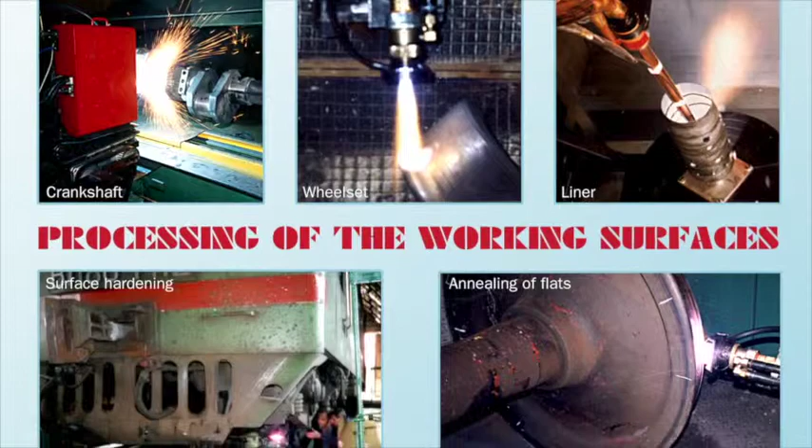Our company brings together leading experts in the field of plasma technology and gas thermal processing of metals. Since 1996, we have actively participated in solving the complex of rail wheel problems on Ukrainian railways. We have carried out long-term successful tests of heat-treated wheels with the participation of leading specialized institutes of Ukraine.

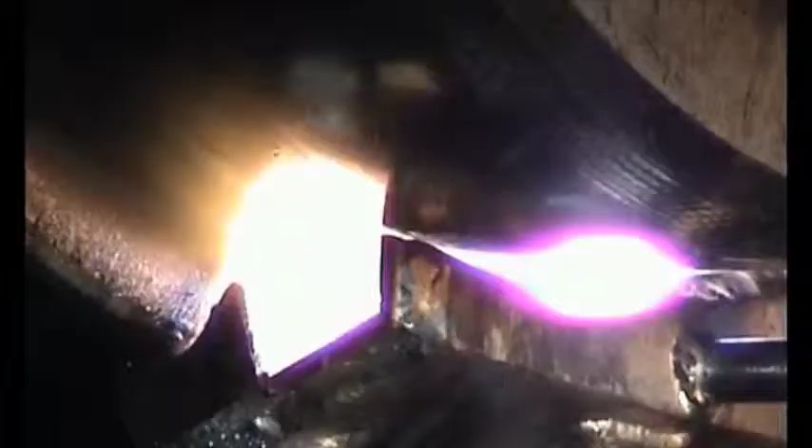Our equipment for plasma hardening of solid-rolled and bandaged railway wheels is widely used on the railways of Ukraine, Moldova and the Baltic states. The problem of wheel and rail joint operation, their reliability and life duration, is of current interest for all railways in the world.

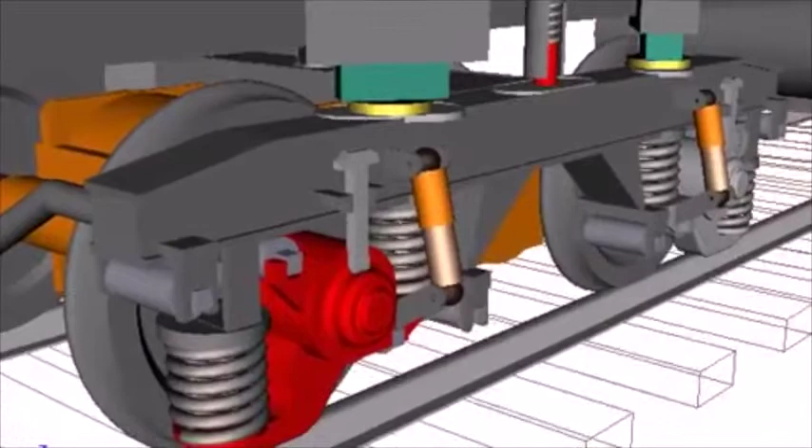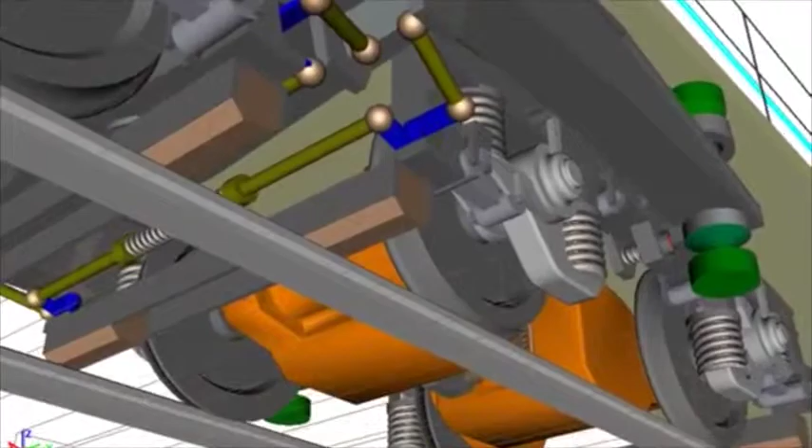Railway wheels and rails must withstand the specified level of load and force impact arising from interaction between them while preserving long durability. Even today, the standard wheel resource does not meet increased operating requirements. The current trend of increasing train speed and increased loads leads to growth of tension in the contact of rail wheels and rails. This inevitably is accompanied by significant wear of contacting surfaces, which is a major cause of premature replacement of wheels and rails.

Long-term analysis of the wheels and track on the railways of Ukraine shows that during operation, the rolling surface hardness of the wheel and surface hardness of the non-heat-treated rail increases from 270 to 400 Brinell to a depth of 5 mm. This occurs as a result of cold hammering of metal surface layers.

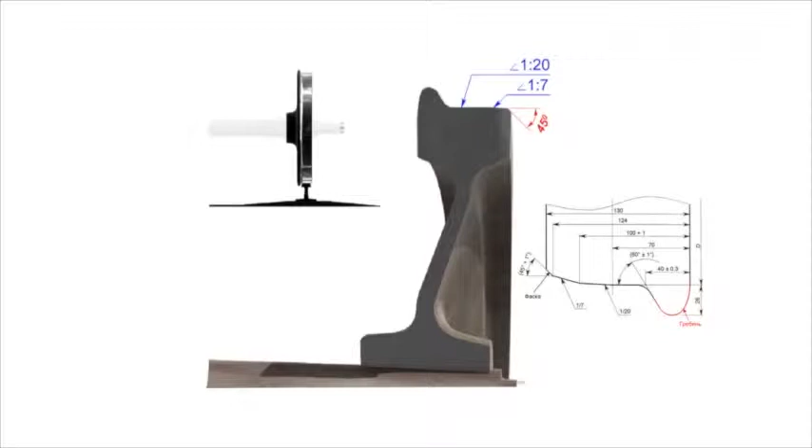At the same time, the surface hardness of the wheel flange and lateral portion of non-tempered rail remains unchanged, 270 to 280 Brinell. That is why, in the contact area of the wheel flange and lateral working head of the rail, increased surface wear is observed. This necessitates gradual machining of wheels and ultimately their premature replacement.

Another important factor influencing the wear is friction in the wheel and rail contact zone, which occurs under conditions of wheel sliding in curves.

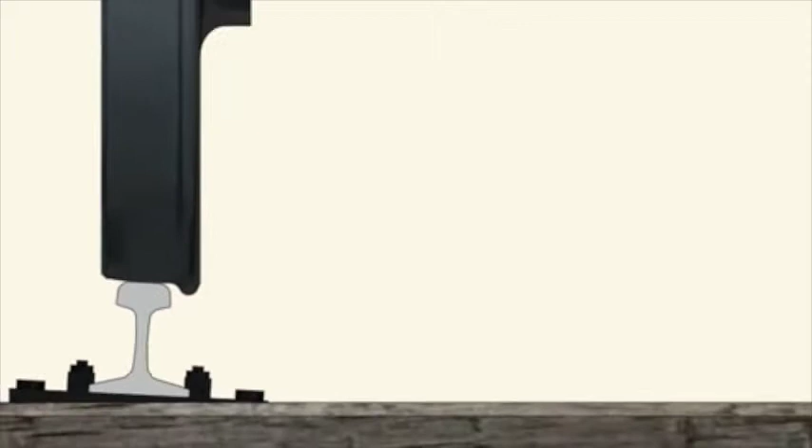With high friction between the wheel flange and the lateral working face of the railhead, fuel consumption for hauling operations significantly increases, wear of wheel flanges increases, and in some cases there is danger of derailing of wagons.

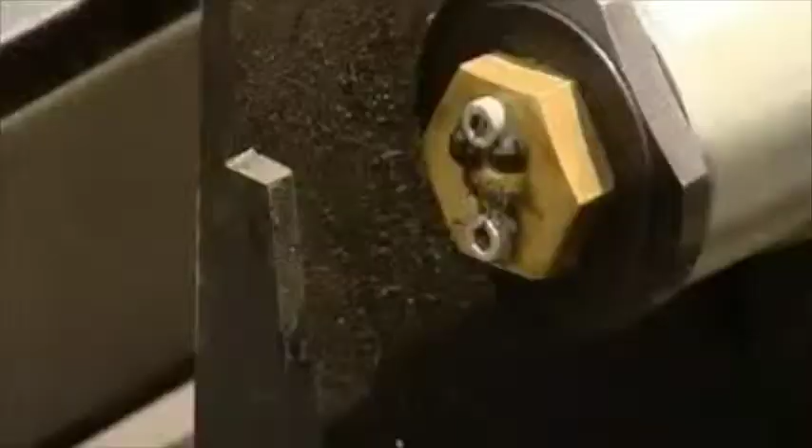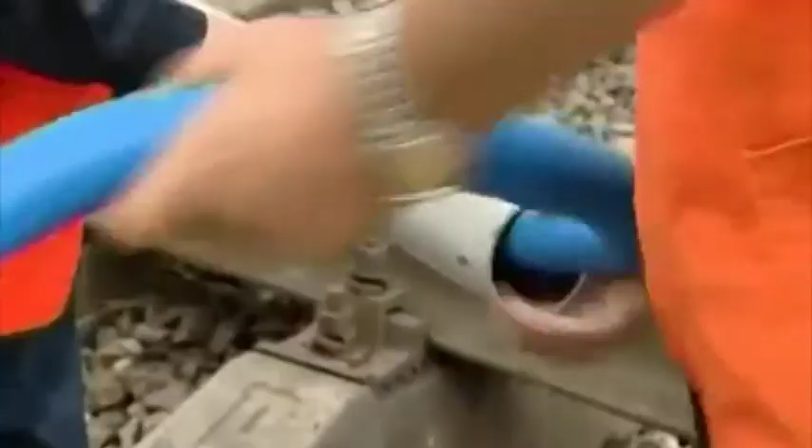The most common technique for decreasing the coefficient of friction is the use of traveling lubricant pumps. They are used for forced rail and wheel flange lubrication. However, they are extremely unreliable in operation and do not provide sufficient effect.

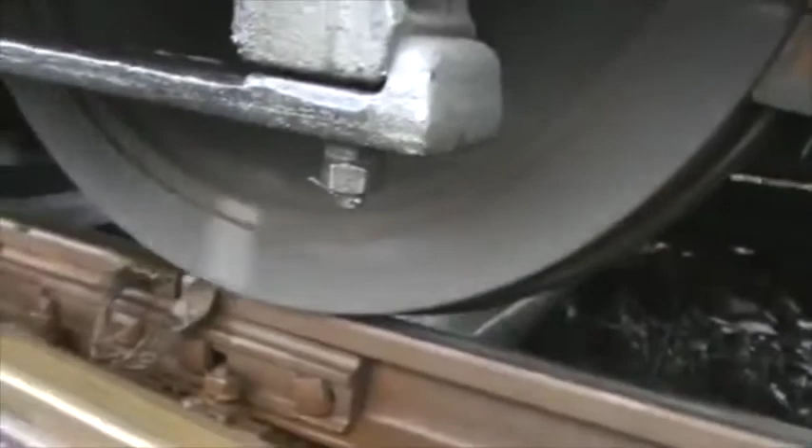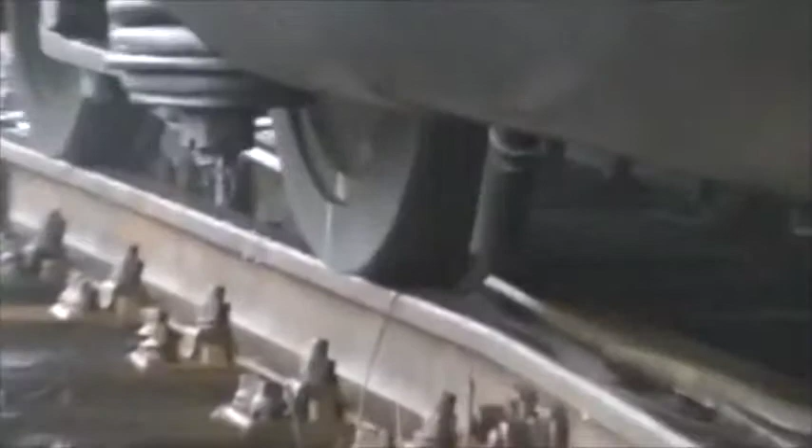This technology is particularly ineffective in conditions of rolling stock operation in the highlands. Grease inevitably falls on the tread surface, which causes a slippage effect. To eliminate this effect uphill and downhill, it is required to pour sand on the rails, causing a natural converse effect: accelerated wear of rails and wheels.

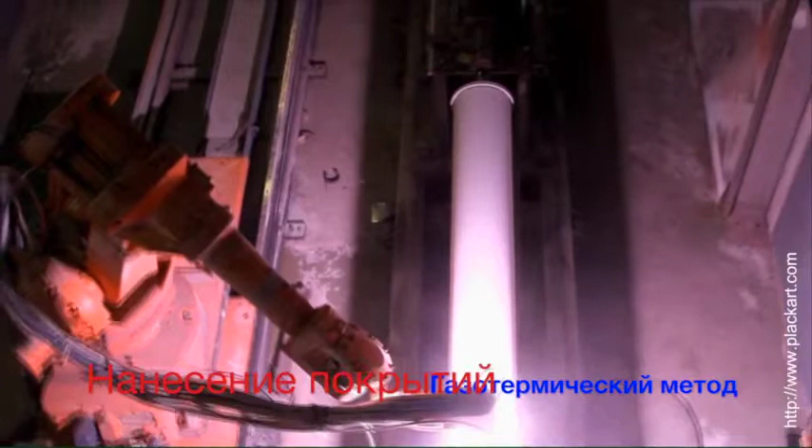As a means of solving the wheel-rail complex problem, attempts were undertaken to apply low-friction coatings on the lateral surface of the railhead by gas thermal method. This solution had certain advantages, but insufficient mechanical strength of adhesion to the substrate causes the coating to strip off in a very short term. Therefore, this trend can be regarded as a dead end.

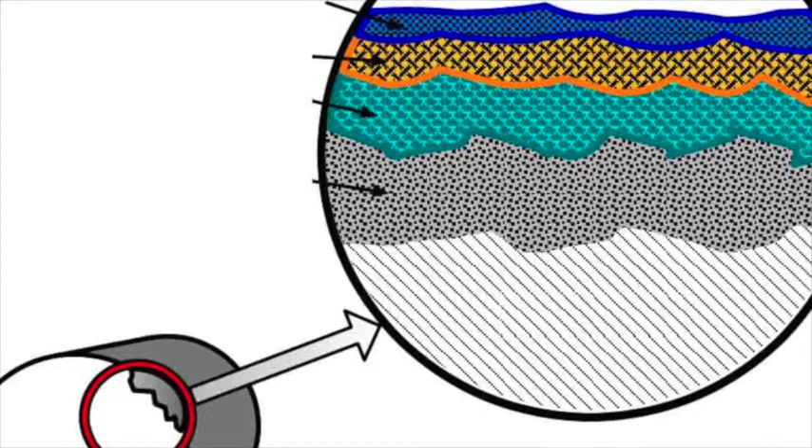As practice shows, the ideal solution of the wheel-rail complex problems can be obtained through increase of the surface hardness of the working areas of rails and wheels, selection of the optimal ratio of these values, and reduction of the coefficient of friction in the contact zone.

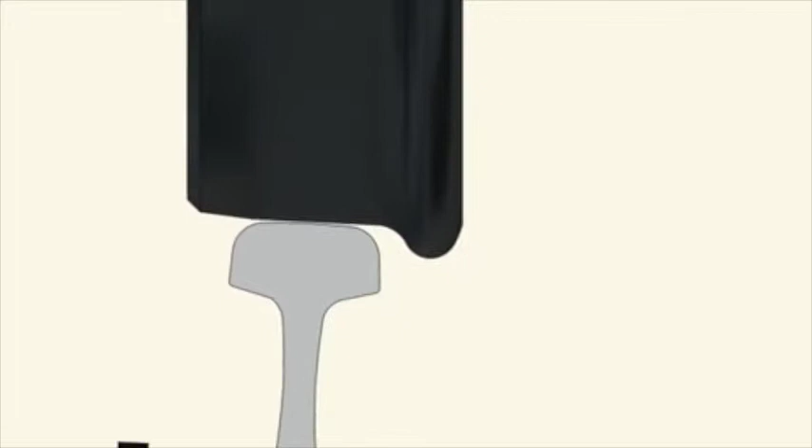We have essentially proved that hardening wheel flanges to a high hardness becomes an effective way of lateral wear control of both wheel flanges and rails. Similar conclusions were reached by Swedish and German experts.

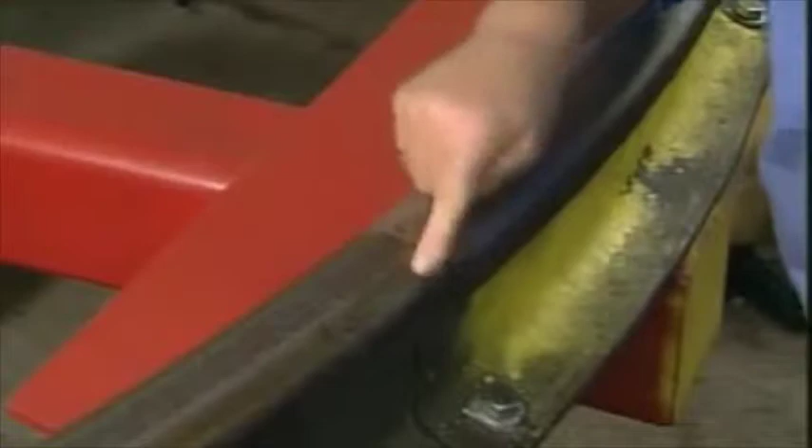They offer a solution which performs melting of the surface by laser and application of a 2 mm wide strip of cemented carbide alloy on it. It is expected that this technology slows down the wear of wheels by 4 times, while reducing wear of rails and noise level. These figures are questionable, given that the bandwidth of the hardening strip is only 2 mm.

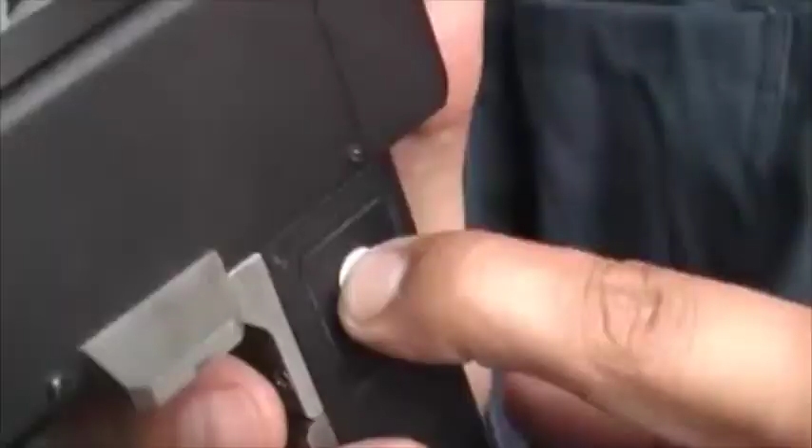In addition, this technology has a number of disadvantages. It is quite complicated in implementation and requires highly skilled personnel.

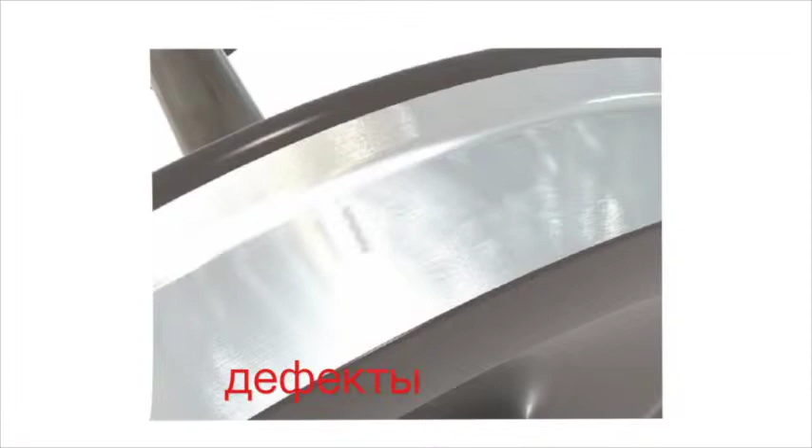The practice of using argon plasma hardening method, developed by Russian specialists as well as HFC in Poland, is also not widely used because of significant deficiencies, including low depth of surface hardening, low productivity, and high probability of defect formation, depending on environmental conditions.

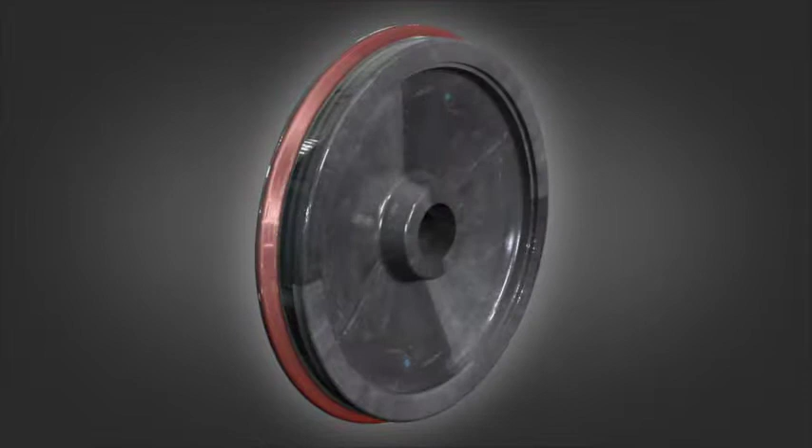The development we offer has a number of significant advantages, and at the moment can be considered the most effective means of solving the rail wheel complex problem.

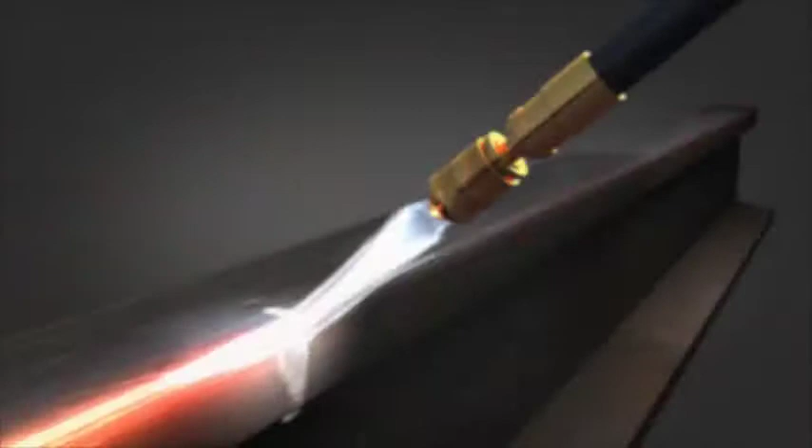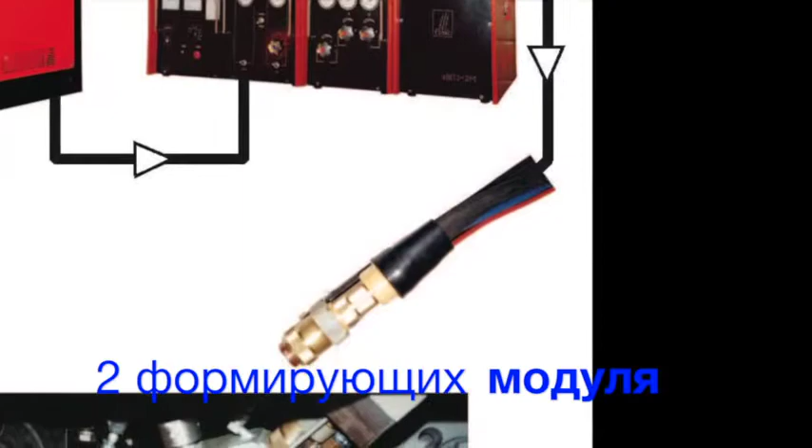The unit is designed for surface hardening of wagon wheel flanges and the working part of the rail head surface. The unit includes: first, a source of energy; second, control equipment consisting of 3 units; third, a computer module; fourth, 2 forming modules with cable hose pack up to 8 meters long; fifth, an autonomous cooling unit.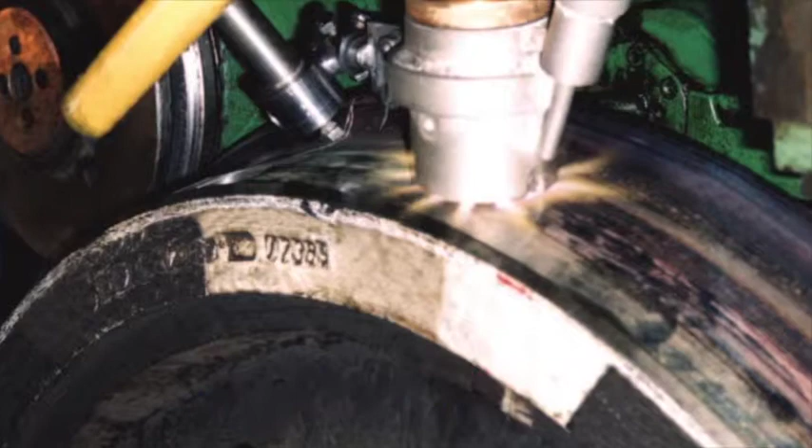The basic unit can be supplied without the computer module. On the basis of the unit, we developed a new technology of slid flat release on the rolling surface. Equipment and technology are patented in Ukraine, Russia, Kazakhstan and China.

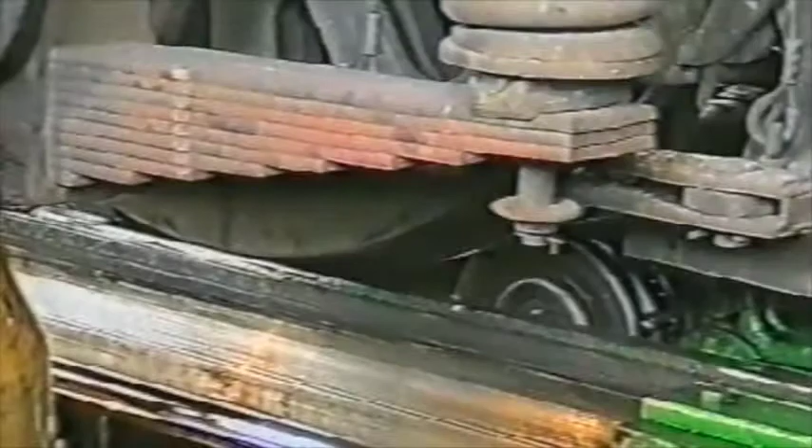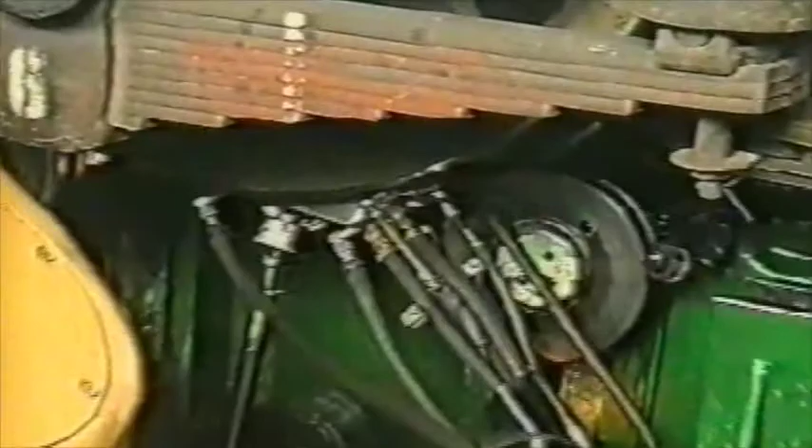After long-term run tests of hardened wagon wheels on the test railway routes of Dnipropetrovsk Institute of Transport Engineers, the first set of equipment was installed at the Znamenka locomotive depot. Since 1996, the railroad depot carries out locomotive wagon wheel flange hardening directly under the locomotives. In 1996, our equipment was also installed in the locomotive depot Lviv Zahid.

In 2000, a modified unit with computer module was installed in this depot. In locomotive depot Krasny Liman, the equipment was installed in 2012.

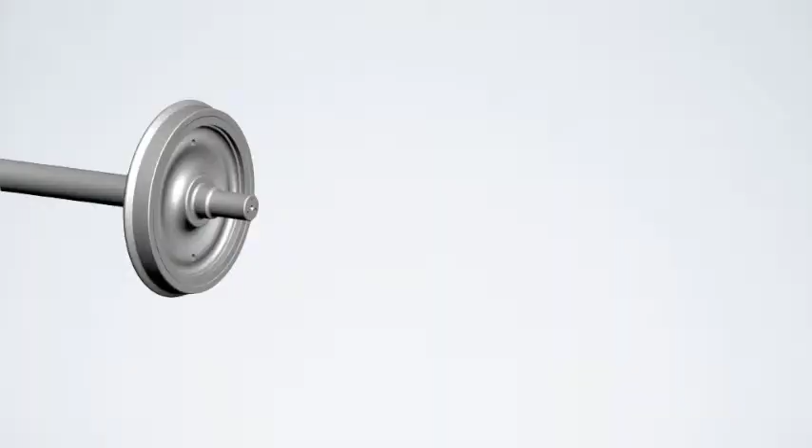Our solution has the following indisputable advantages. Cost effectiveness: the cost price of one wagon wheel hardening is only $23. In Ukraine, the annual economic effect is from 800,000 to 1.5 million US dollars per railroad depot.

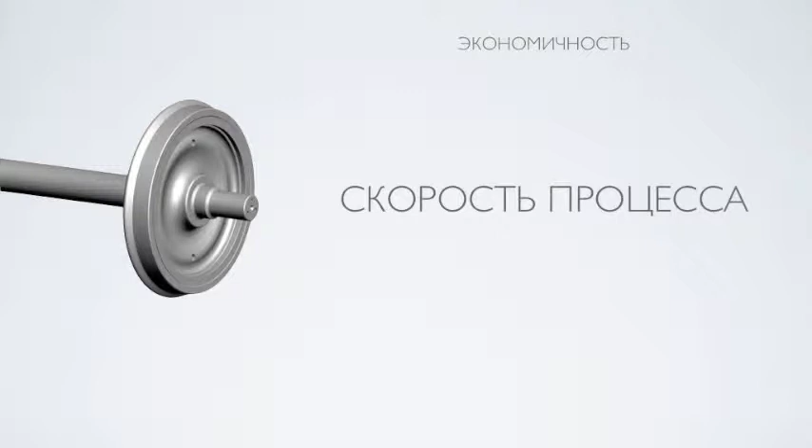High speed of the process: one wheel hardening takes only 5 minutes. Ease of operation: no need for highly skilled service personnel and no complex procedures.

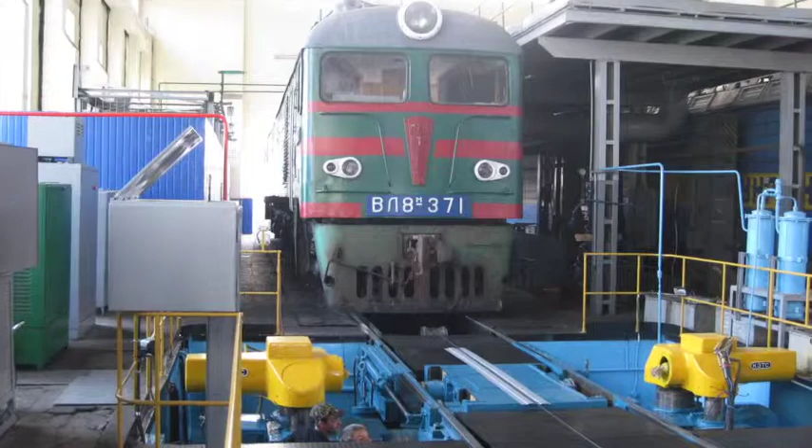High reliability of equipment, proved by long-term successful operation in Ukraine, Moldova and the Baltic countries. Independence from environmental conditions: the equipment produces no defects even when operating in open conditions at temperatures from -10 to +40 degrees Celsius. Process versatility.

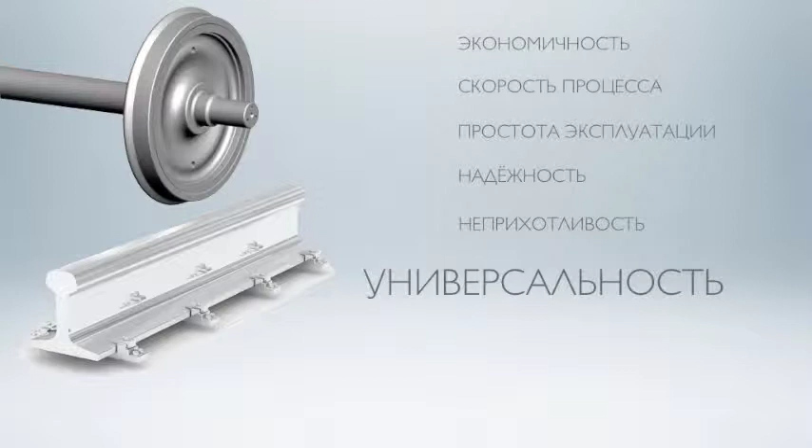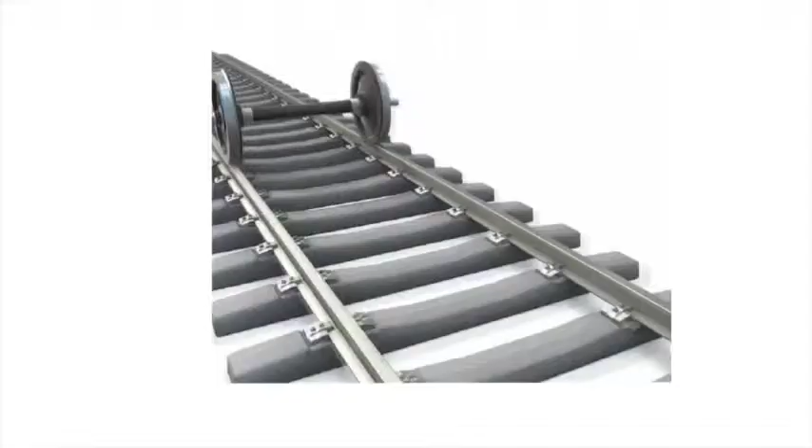The equipment can be used for hardening both wheel flanges and rail heads. Only our equipment is capable of carrying out hardening of the rail working head directly on the railways and in outdoor conditions. After wheel flange and working rail head hardening, the coefficient of friction reduces by 40%.

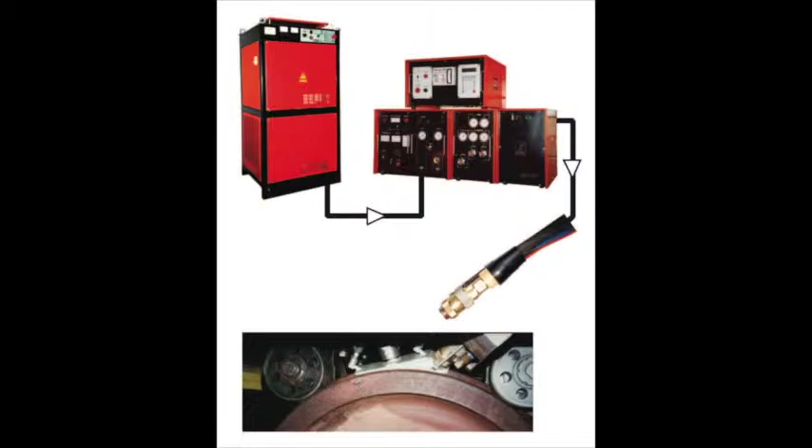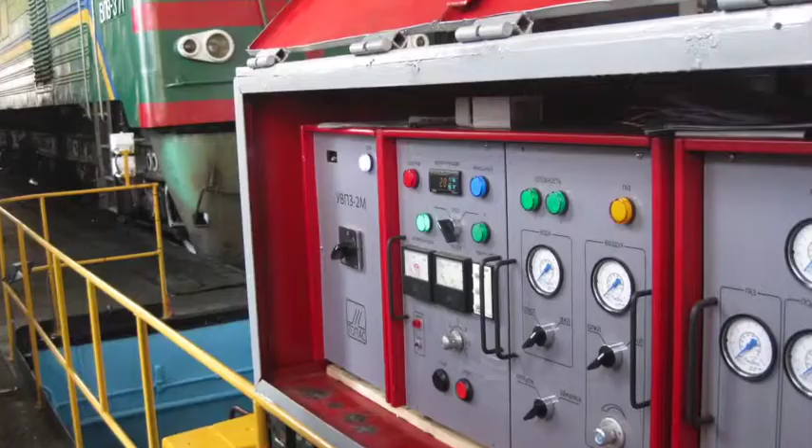Technologies and equipment offered by us are a versatile, effective and cost-effective solution to rail wheel complex problems, have a number of advantages compared with other methods, and are of interest for all railways in the world.

At the moment, we have produced and installed more than 30 sets of equipment for wagon wheel hardening. Hardening of locomotives, passenger and freight wagons, and suburban electric trains is carried out.

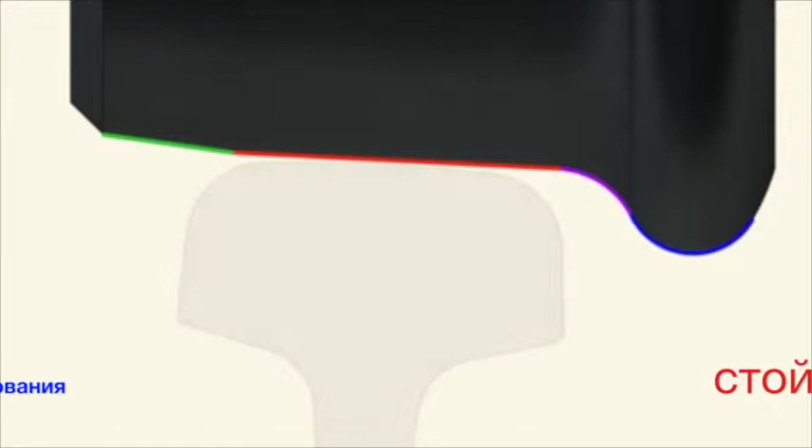Unique experience in the formation of optimal hardening structures has been accumulated. Our equipment and technology are certified in Ukraine, Moldova and the Baltic countries and provide high resistance to cracking in the range of surface hardness from 300 to 600 Brinell.

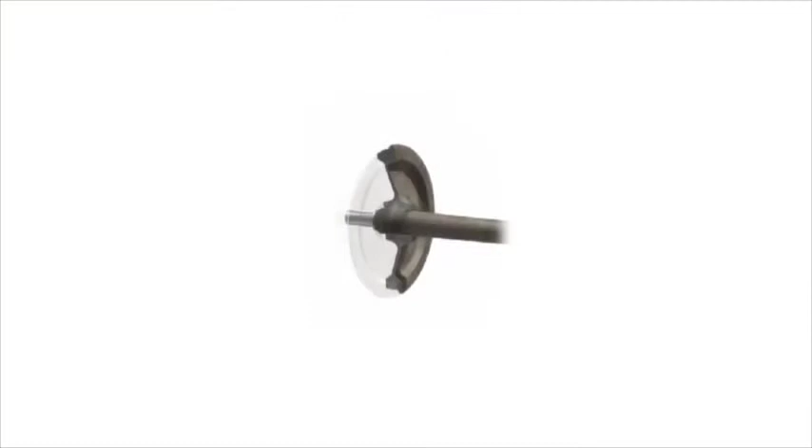Only our equipment and technology ensures repeatability of the optimal structure of the wheel flange hardened zone across ambient temperature variation from -10 to +40 degrees Celsius.

Wear intensity of wagon wheels hardened with our technology decreases by 2.5 to 3 times. Only our solution allows hardening of the working rail head in an outdoor environment and directly on the rail. Only our solution decreases the wheel-to-rail coefficient of friction by 40%.

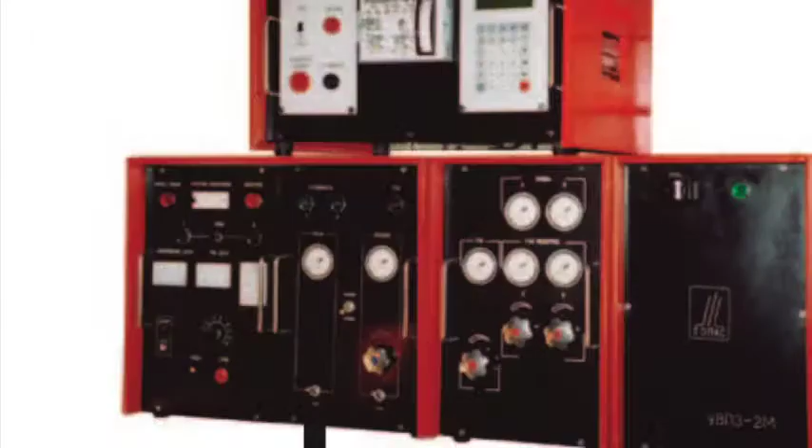Even today, we are ready to solve a number of issues in rail-wheel complex problems through manufacture of universal equipment for hardening of wheel flange and working rail head.